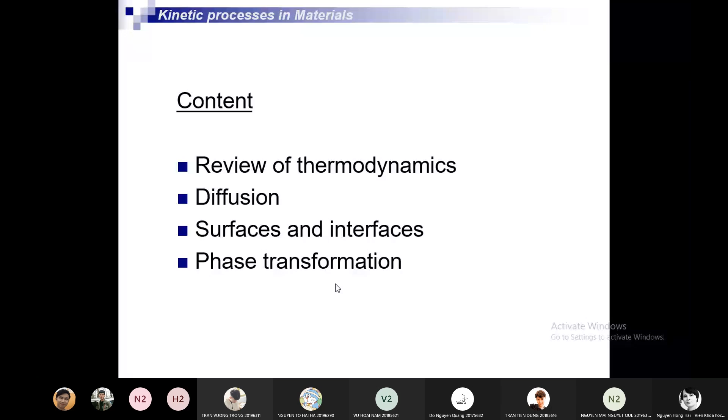So firstly, we classify matter by state. You know, matter can exist in 3 main states: liquid, solid, and gas.

And now there is another state: plasma, one more state. But the main states of matter are liquid, solid, gas.

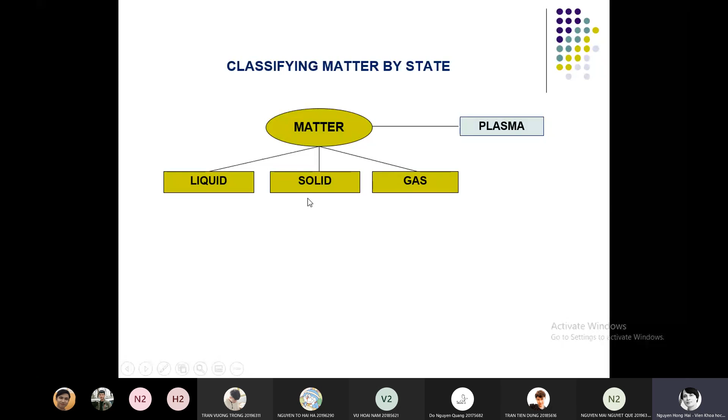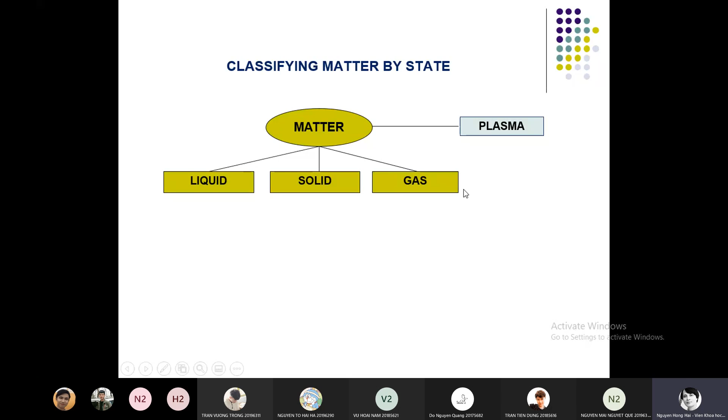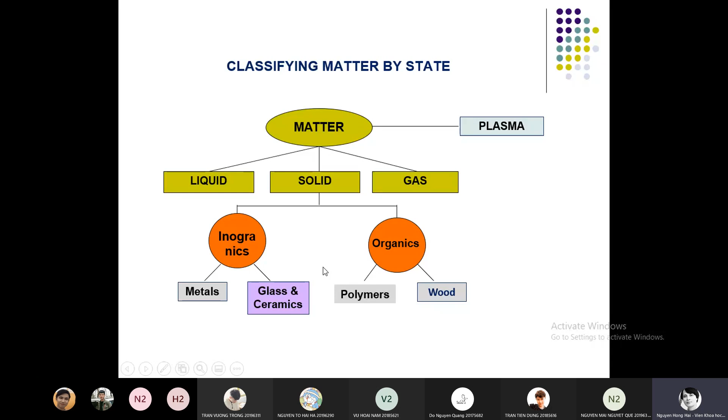Only solid can be considered as a material. Liquid and gas are not material. So for solid, we have inorganic and organic. For inorganic we have metal, glass, ceramic. And for organic, we have polymer, wood. So only this can be considered as material, only solid.

So to make a material, we have to transform liquid and gas into solid. This is the phase transformation.

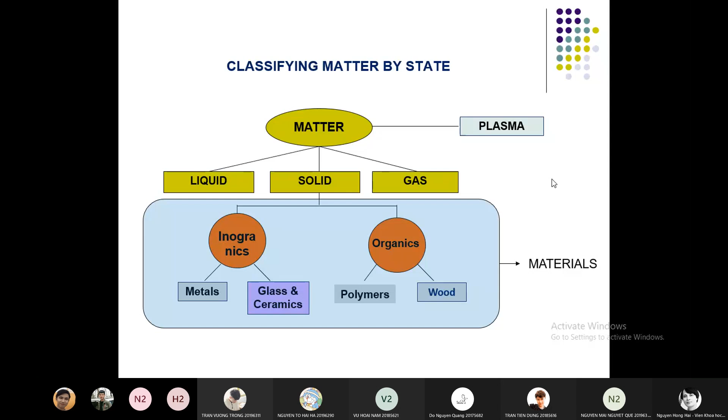And this is a material cycle. So from the raw material of the earth, we can obtain some raw material, and by synthesis and processing, we make material, engineered material. And from this material, we make the product, which we use in industry and in our conventional life.

And then we use this product. After this, maybe some waste, so it is returned by recycle to the synthesis and processing. So the cycle grows like this. Maybe some waste returns into the earth.

So your task here is processing to make the material, from raw material, to make the engineered material by synthesis and processing. So it is our field of study and activity.

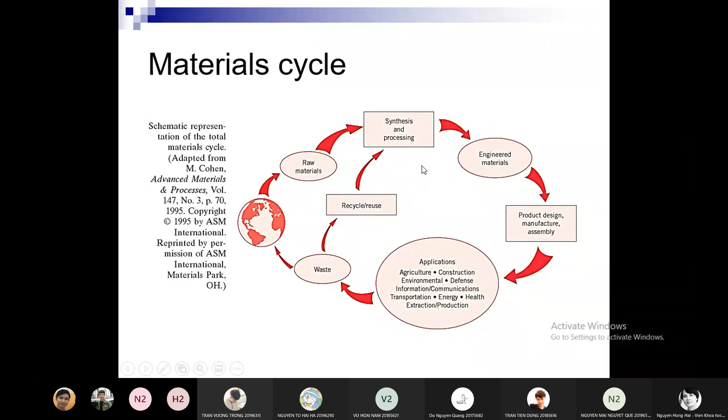By composition and synthesis processing, you can make the material with the desired structure and microstructure. And this structure and microstructure of material determines their properties and performances.

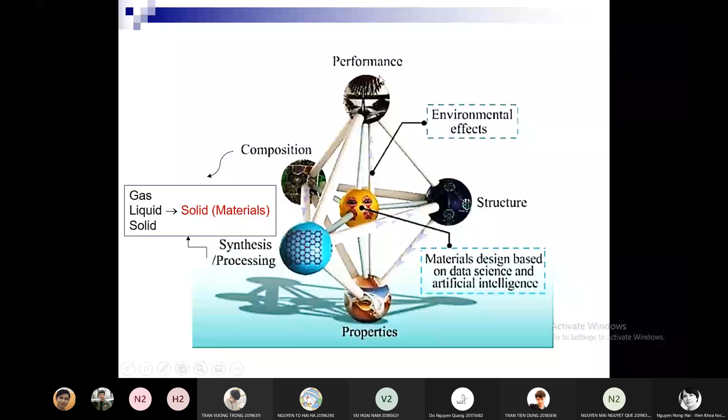So we have the main features: material composition, and synthesis and processing. This will determine the structure. Structure determines the properties and performances. And we can see in this picture the physical space of material.

So we begin from chemistry, from chemical composition. You can see here 5 circles. At the center, we have chemistry or chemical composition.

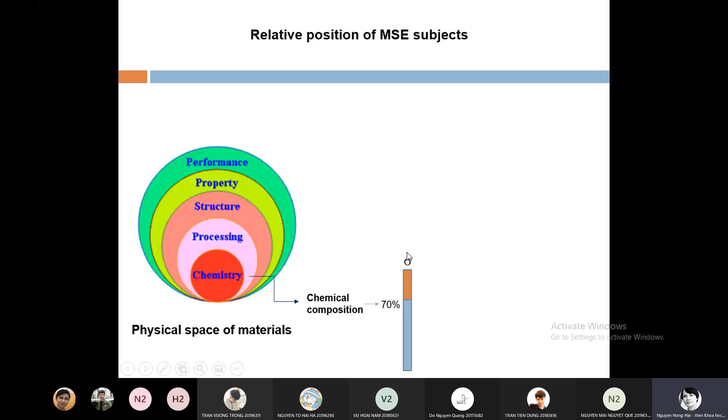From this chemical composition, we see that about 70% of the strength comes from chemical composition, of alloy, metal, and something like that. So the rest, 30%, comes from processing.

Processing includes something like crystallization, solidification, deformation, heat treatment, and so on. It is processing to make material, inert material, and this contributes 30% of strength. But we never reach 100% strength of the alloy.

Never, not yet. We tend to reach it, but at present nowadays we have not reached 100% of the strength of material. We will try to do this.

So beginning from chemical composition, via processing, we make the material with desired structure and microstructure. What is the microstructure of the alloy? It is the size and morphology of the grain, crystal grain, and lattice defects.

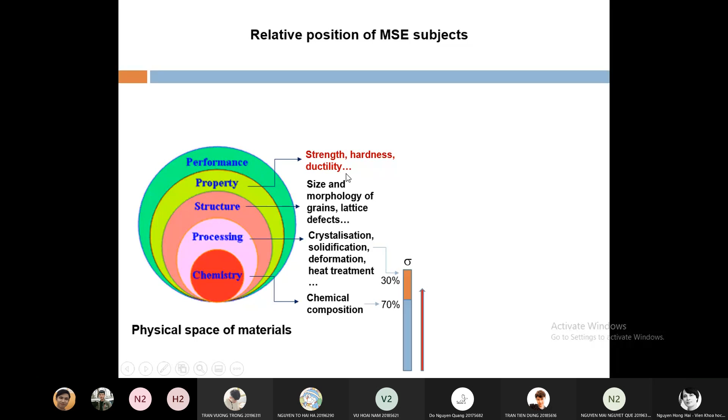strength, hardness, ductility, elongation, and so on — the trend — and finally performances, for example fatigue, creep, corrosion, and wear resistance, and so on. These performances are related with the environment.

So we have 5 cycles. The physical space of a material consists of 5 cycles like this: at the center we have chemistry, then processing, structure, properties, and performances.

So, corresponding to this physical space of material, we have this very strongly related environment, and the MSE subject, material science and engineering subject, like thermodynamic, kinetic, crystallography, property performances.

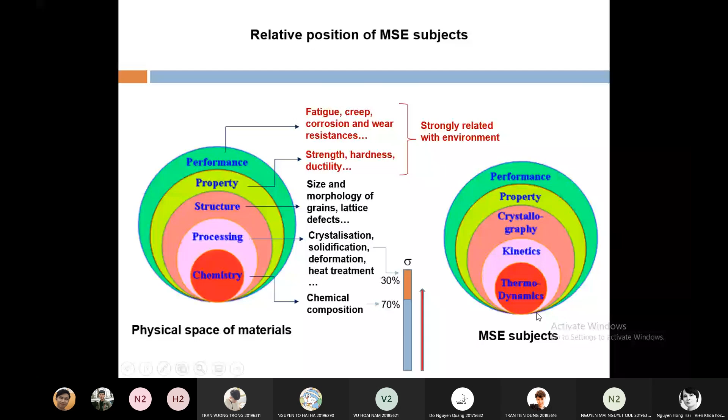So we have the 5-cycle corresponding to this physical space of material, and our subject, our course, kinetic process in material, belongs into this kinetic processing and kinetic. So we have kinetic process in material. This is the relative position of our course.

And you know that the difficulty increased towards the center. The thermodynamic is, our course is rather difficult, thermodynamic is the most difficult. Okay, so we have the physical space of material.

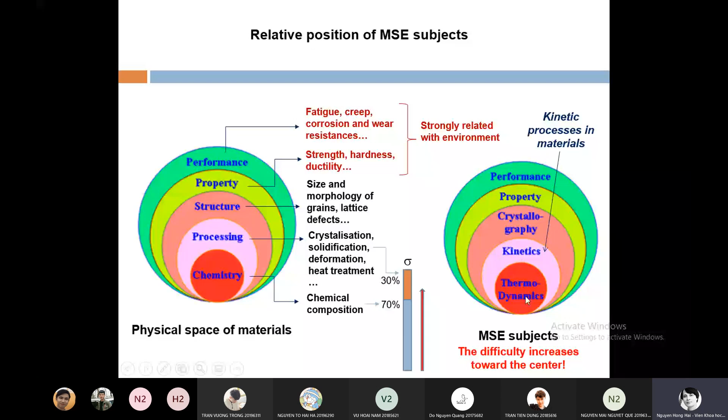Chemistry, processing, structure, property, performance. So the outermost cycle, the performance, characterizes how material behaves in the given environment, how the material behaves, and this is strongly related to the environment, the outermost cycle.

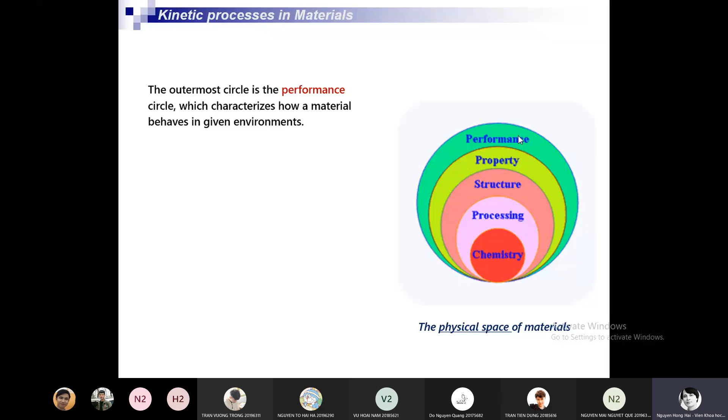And then the performances are realized by the set of the properties in the second cycle. So the properties are achieved by the agglomeration of the phases, its various structure.

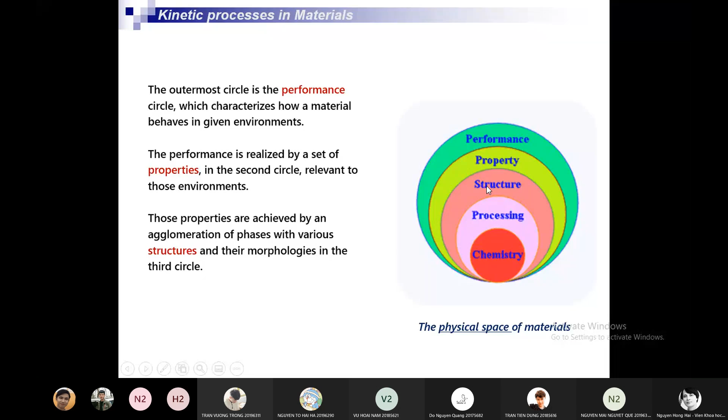So this property can be achieved by structure, and the morphology is the third cycle. And structure is obtained through the proper processing and the chemical composition, accurate chemical composition.

So the chemistry composition determines the structure. Structure determines the property and performances. So processing is a very important step in the making of material. It determines the structure of material, like metal or alloy.

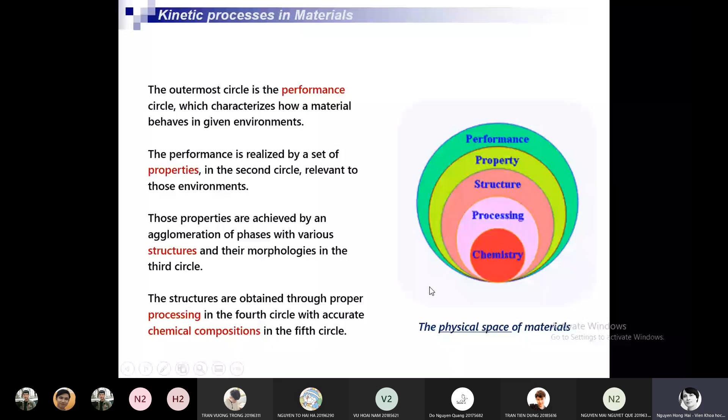So our course, kinetic processing, is the second cycle. And why the two outmost cycles, performances and properties, are very strongly related to environment - this one, chemistry, processing and structure, or thermodynamic, kinetic, crystallography - they are the key components of material science and engineering.

Three key components: crystallography, kinetic, and thermodynamic. And thermodynamic and kinetic are viewed as difficult subjects. So we have three key components of material science and engineering: thermodynamic, kinetic, and crystallography.

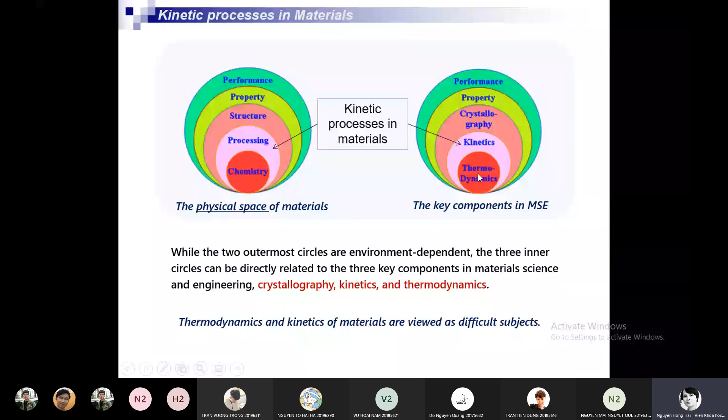So, different aspects of the material processing: structure, property, processing, and performances. Okay, so that's some introduction to the material.

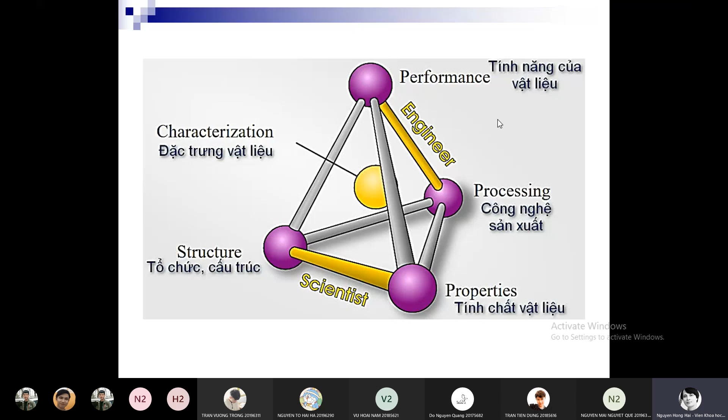So we now turn to thermodynamics. Chapter 1, thermodynamics. The main use of thermodynamics in physical metallurgy is to allow the prediction of whether an alloy is in equilibrium. Equilibrium is the most important concept in thermodynamics.

The alloy or the system is in equilibrium or not - we have to answer this question. And in considering the phase transformation, we are concerned with the change towards the equilibrium. If some system, some alloy, is not in equilibrium, it will change - it will change its structure, microstructure, and so on towards the equilibrium.

And for this, thermodynamics is a very powerful tool. But the rate at which equilibrium can be reached cannot be determined by thermodynamics alone. So we need kinetic processes. The kinetic process will allow us to know how quickly the equilibrium can be reached.

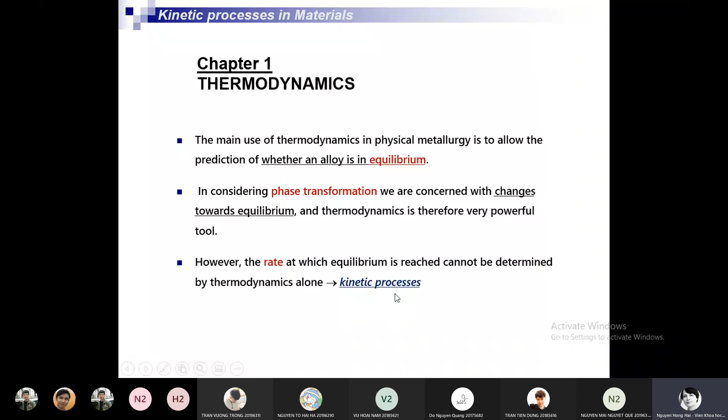It's a kinetic process. The thermodynamic allows us to know only whether the alloy is in equilibrium or not. But thermodynamics does not allow us to know how quickly the system can change towards, can reach, the equilibrium - that belongs to kinetic processes, not thermodynamics. So the main question of thermodynamics is whether the system is in equilibrium.

The main question of thermodynamics: if the system, the alloy, the phase, and so on, is in equilibrium. So what is the system? System is a mixture of one or more phases. Maybe one phase can constitute a system, but maybe more phases - so system is a mixture of one or more phases.

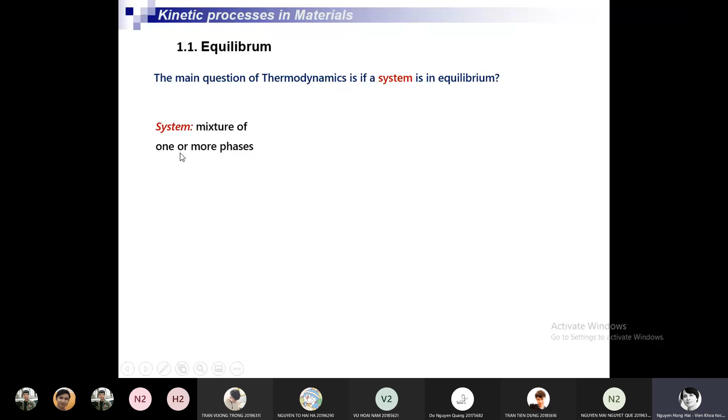For example, you have the aluminum-silicon alloy, aluminum-silicon system - it is a phase diagram, aluminum-silicon phase diagram. We have a eutectic here. So in this system, we have two phases, aluminum and silicon. So this system is a mixture of two phases, and we have a eutectic alloy, a eutectic composition.

It's about 12% of silicon. So before this composition, we have a hypoeutectic alloy. For example, alloy A356 with about 7% of silicon. So for this system, for this alloy, we have the microstructure like this. We have primary aluminum like this - it's a dendrite, in the form of a dendrite.

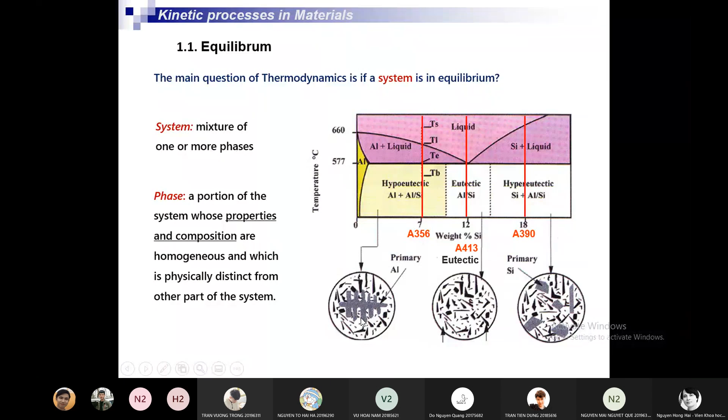For example, in this system, by grain boundary, by interface between the aluminum and eutectic - distinct from the other part of the system, mainly by surface, the grain boundary, and by interface between phases, is the phase. So you should remember what is the phase: two features. First is the properties and composition are the same everywhere, homogeneous, and physically distinct from the other part of the system by the boundary, by the interface. It's the phase.

So in this system, you have two phases, aluminum and silicon, and they are distinct. Okay, you can see silicon or aluminum absolutely distinct from eutectic structure. Okay, it is a phase.

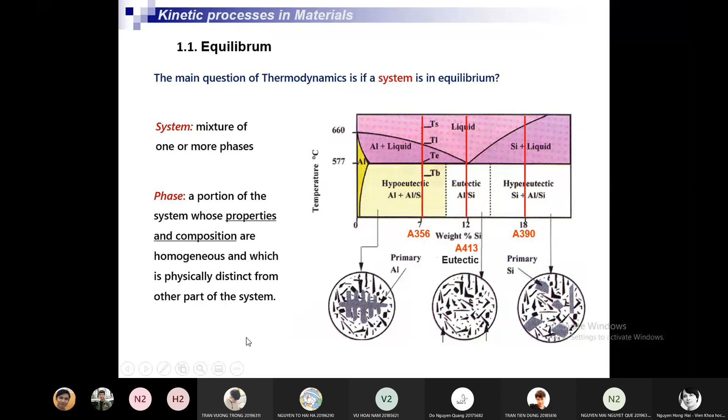So we have the example of this alloy A390. It's 18% of silicon. So we have this microstructure of the hypereutectic aluminum silicon alloy. This one. So we can see the primary silicon.

Platelet, gray, platelet like this. Very coarse, very harmful, it's very coarse. You see. And you have the eutectic - it is a fine silicon platelet embedded in the aluminum like this. It's eutectic.

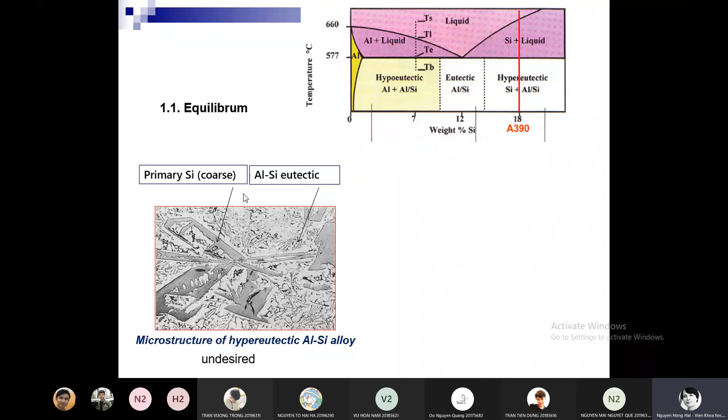So if the primary silicon is so coarse, very coarse, it is very harmful, and the mechanical properties of this alloy is not high, not high. We have to make this primary silicon finer. This is the undesired microstructure, because the primary silicon is very coarse, and so the mechanical properties are not high.

But what processing and how to do it is another question. To make the primary silicon finer, we have to apply some processing, some technology, some technique to achieve it. This is the role of processing. This processing allows us to have the desired microstructure to improve the properties of the alloy, of the material. That is why you need modern, recent processing processes, why you need to apply technology, high technology, and so on.

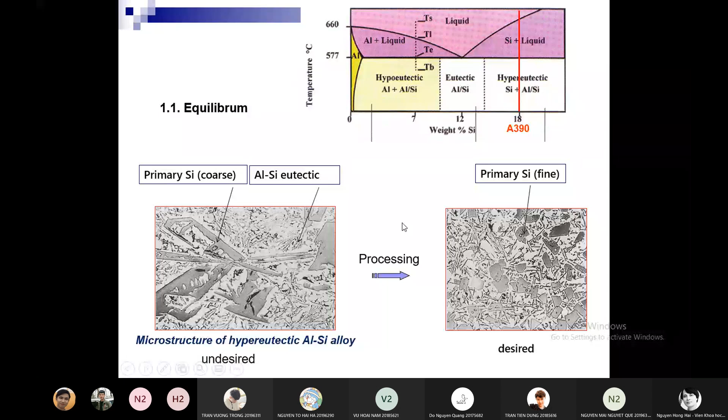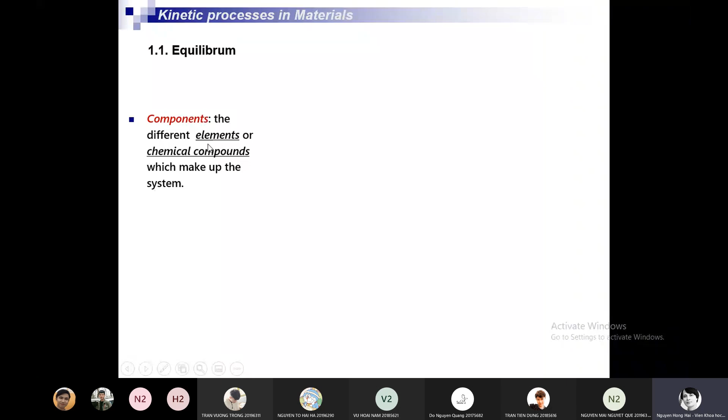So the next thermodynamic term is component. Component - it is the different element or chemical compound which make up the system. Maybe the element, maybe chemical compound - it's also component. So for example, we have the iron carbon system.

This component, and the composition of a phase of the system, can be described by giving the relative amount of each component.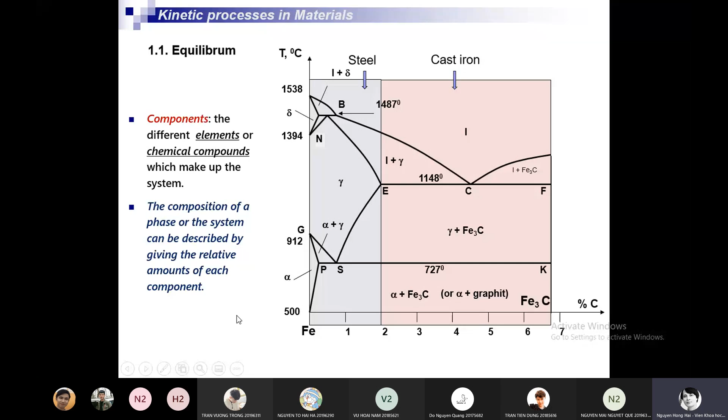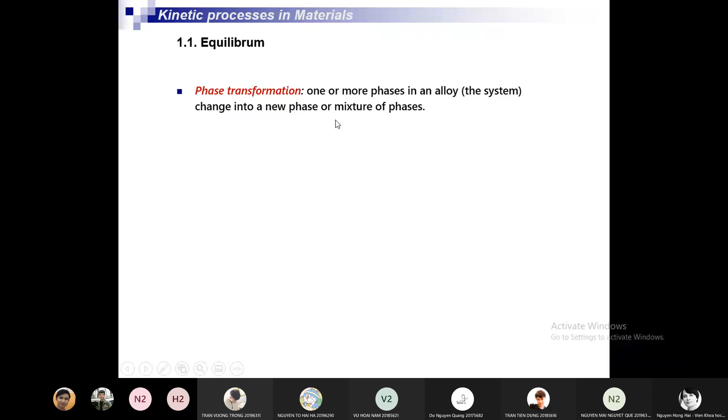So the phase transformation: one or more phases in an alloy or in a system - alloy is a system - change into a new phase or mixture of phases. One or more phases, maybe one, maybe more phases in an alloy, change into the new phase or mixture of phases. It's phase transformation.

For example, we have this aluminum silicon system, and there is some iron. So we have an intermetallic compound like this, and it is beta: aluminum 5, iron and silicon. They have a platelet form like this, and it is very harmful. It's an undesired microstructure. It's an intermetallic compound, beta, aluminum 5, iron and silicon. Very bad microstructure, undesired.

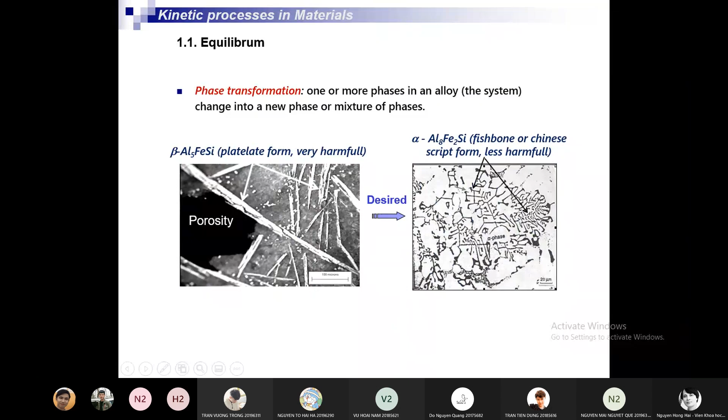This is more desired. You also have the intermetallic compound, but in the form of alpha, with the chemical formula aluminum 8, iron 2, and silicon. They have a fishbone, or Chinese script form, and are less harmful. It is desired, more desired than this one, for the aluminum, silicon, and iron system. In this system we have 3 components: aluminum, iron, and silicon.

You see, we have to make this microstructure instead of this one - it is very harmful. This one is much better because the intermetallic compound aluminum, iron, and silicon with the fishbone or Chinese script form is more compact than this one. But this is stable. This is stable, this is not stable - unstable. So because this is unstable, this microstructure will transform to this one, because this is stable. See, the desired transforms to undesired.

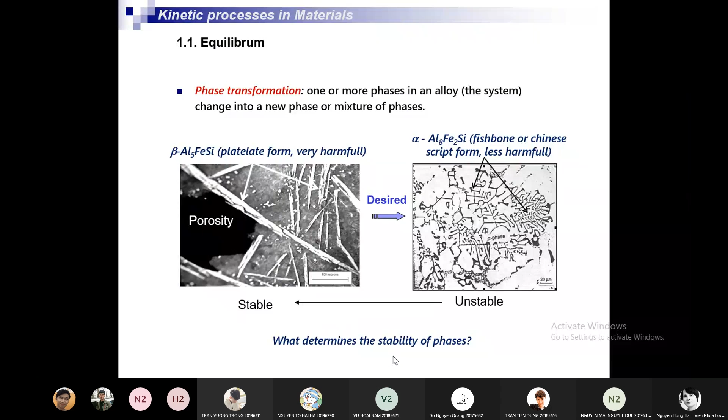So at constant temperature and pressure, the relative stability of a system is determined by the Gibbs free energy. And we have the formula to calculate the Gibbs free energy: G is the Gibbs free energy equal to H minus TS.

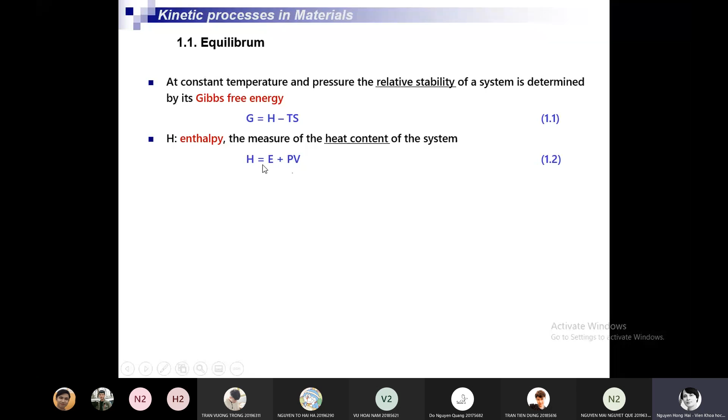H is the enthalpy. Enthalpy is the measure of the heat content of the system. Normally, enthalpy is equal to E plus PV, here E is the internal energy of the system, P is pressure, and V is the volume of the system. So enthalpy equals internal energy plus PV.

But in general, for condensed phases such as solid and liquid, the PV term is very small in comparison with the internal energy. So we can say that enthalpy is approximately equal to the internal energy, because this term PV is much smaller than the internal energy term.

It is H in the free energy equation, the enthalpy. T is absolute temperature, and its unit is the Kelvin degree. And S is the entropy of the system, the measure of the randomness of the system. So you see, enthalpy is a measure of the heat content, and entropy is the measure of the randomness of the system.

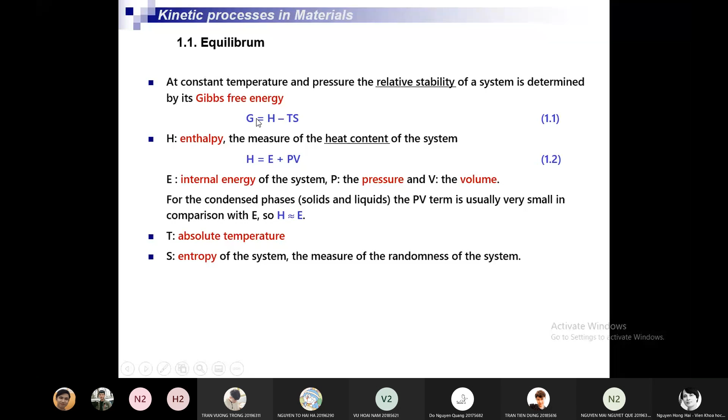So the stability of the system is determined by its Gibbs free energy, and the Gibbs free energy can be calculated by this equation, H minus TS. And from above you have the intensive properties. It means this property is independent of the size of the system - temperature and pressure are independent of the size of the system. It's an intensive property.

When they have extensive properties, they are directly proportional to the quantity of material in the system, and this includes volume, internal energy, enthalpy, entropy, and free energy. So we distinguish intensive properties, independent of the size of the system, like temperature and pressure, and extensive properties.

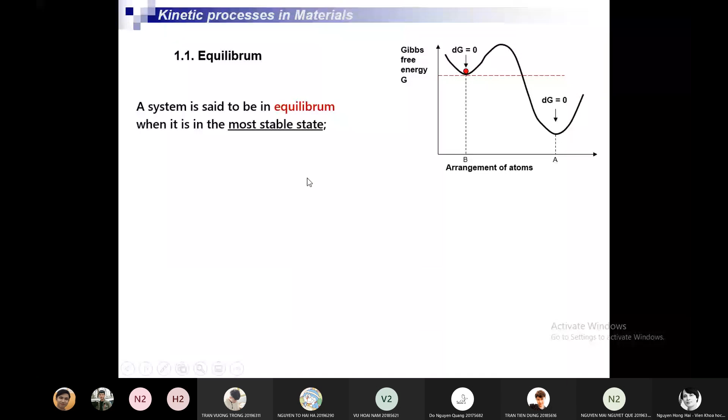So the system is said to be in equilibrium when it is in the most stable state. And stability is meant by this, by free energy. At constant temperature and pressure, a closed system - one system of fixed mass and composition is a closed system.

In the stable equilibrium, if it has the lowest value of the free energy, so we have the stable equilibrium, the phase, the system in the stable equilibrium. If it has the lowest value of the free energy, or in mathematical terms, you can write dG equal to 0, here or maybe here - it's minimum in the energy curve, free energy curve of the system.

Depending on the arrangement of the atoms, see, so here we have the minimum in free energy, here also. So in mathematical terms, you can write dG equal to 0 at minimum.

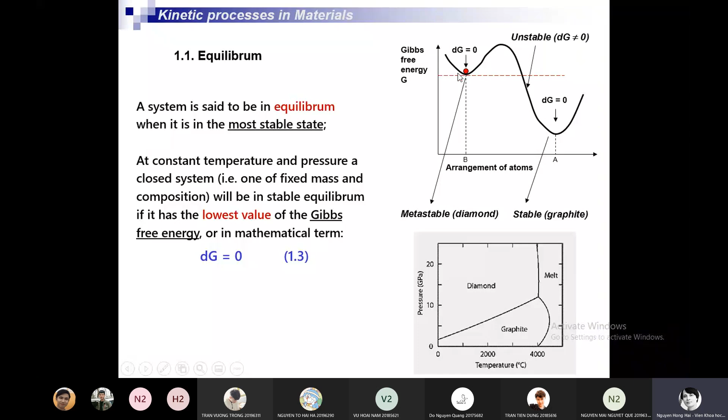So graphite is the stable form of carbon. Diamond is the metastable form because it has very high free energy, and with time...

From this equation we can conclude that the state with high stability will be that with low enthalpy and high entropy. Low enthalpy and high entropy, so free energy will be low. And if this free energy has the lowest value, so we have the stable system. Okay, so the state with higher stability is that with low enthalpy and high entropy, so they will be stable. If the state has high enthalpy and low entropy, we have an unstable state.

State is the arrangement of atoms. And from the unstable state, the system can transform to the stable state. But before this, the energy of the system must be increased a little bit. You see, before transforming from the metastable state to the stable state, the system has to increase its energy a little bit, this one.

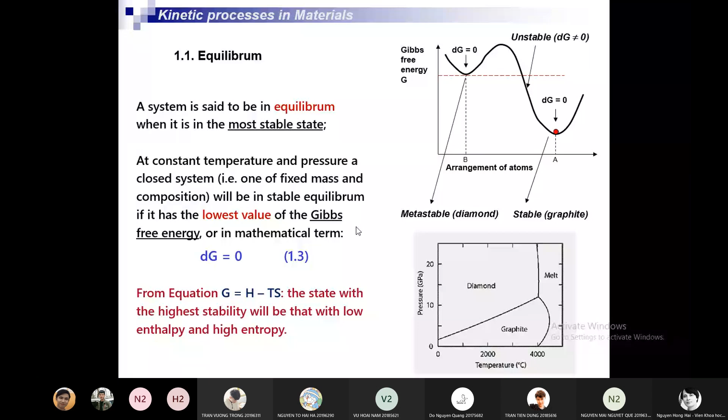So any transformation from the system with higher energy to the system with lower energy, from unstable or metastable state to the stable state, resulting from the decrease in the Gibbs energy. Any transformation that results in a decrease of Gibbs energy is possible.

In other words, any transformation is possible if the free energy will decrease after transformation. So the necessary criterion for any phase transformation is delta G, the change in free energy before and after transformation, must be less than 0. G2 is less than G1, so G2 minus G1 is less than 0, the decrease in free energy. So the transformation is only possible if the free energy decreases after transformation.

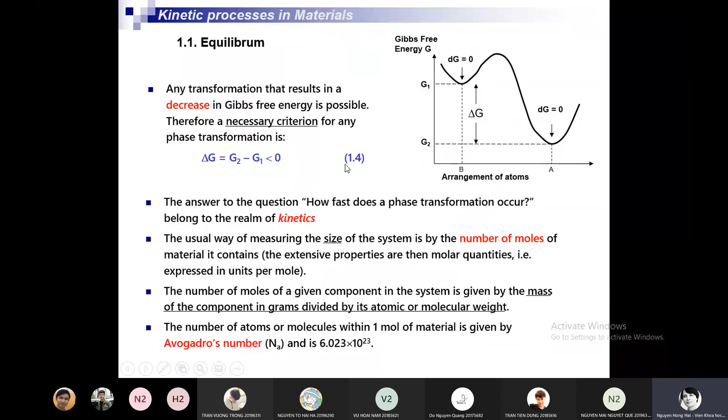Some feature of thermodynamics. And we turn now to the single component system. Only one component in the system. It is single component. So the single component system is a system which contains the pure element or one type of the molecule.

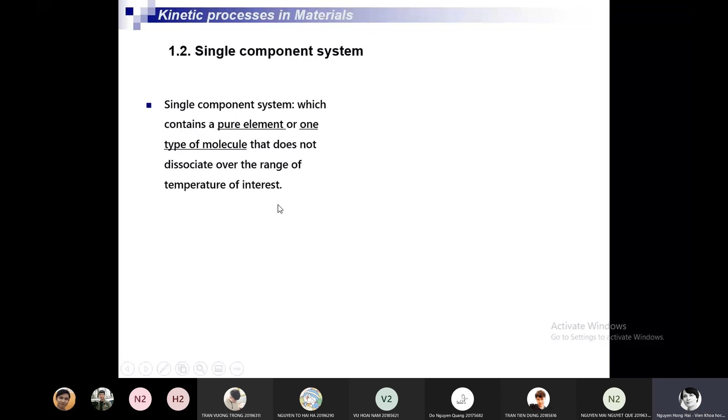This contains only pure element or one type of molecule, and this does not dissociate over the range of temperature of interest. For example, we have this example of carbon dioxide, the carbon dioxide pressure-temperature phase diagram. See, showing some triple point and critical point of carbon dioxide, and we have in this range of temperature and pressure only gas.

Here we have solid in red, and we have liquid and supercritical fluid here. So it is a single, only one molecule, carbon dioxide.

So in order to predict the phases that are stable or the mixture that are in equilibrium, we say the phase is stable or the mixture of phase, the system, are in equilibrium. At different temperatures, it is necessary to calculate the variation of free energy with temperature.

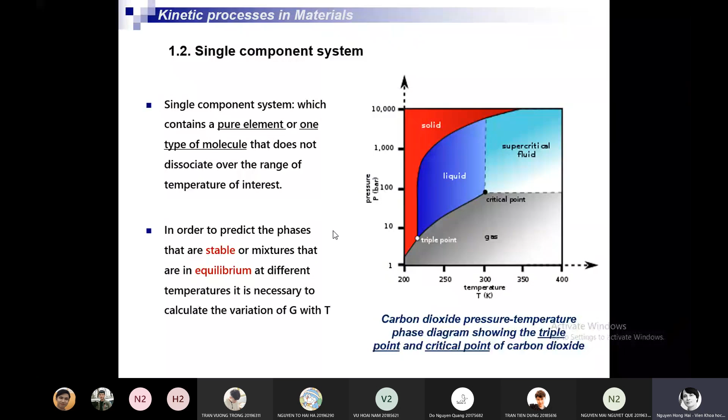So now we introduce some other thermodynamic term, the specific heat. Firstly, it is the quantity of heat in joules required to raise the temperature of the substance by 1 degree Kelvin. The heat we have to supply to the substance to increase its temperature by 1 degree Kelvin, it's the specific heat. We have the specific heat by definition, and we can write it in mathematical terms, we can write C.

Specific heat is equal to the derivative of enthalpy, because enthalpy is a measure of the heat of the system. So it is the first derivative of enthalpy with respect to temperature at constant pressure. This is specific heat: the quantity of heat, expressed by enthalpy, that we have to supply to the substance to increase its temperature by 1 degree Kelvin.

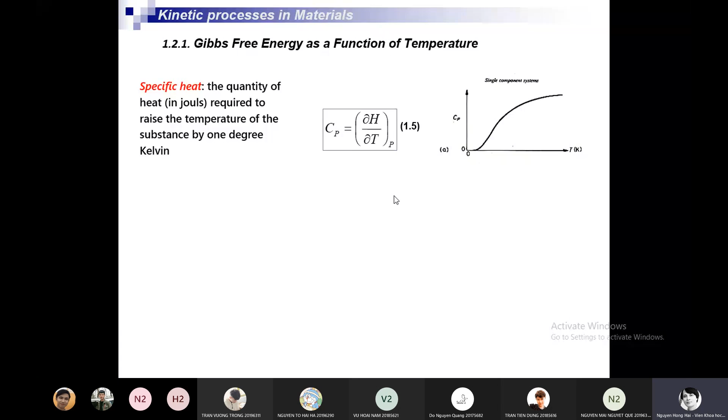Then we have the variation of enthalpy with temperature, which can be calculated by integrating this equation. If we integrate this equation, we can find the variation of the enthalpy. In mathematical terms, we take the integral from the reference temperature to the temperature of interest of Cp dt. So here is the graphic: the enthalpy curve versus the temperature.

The slope of this curve is the specific heat slope. And at this temperature, 298 degrees Kelvin, the enthalpy is zero. So we have the enthalpy curve.

The variation of entropy with temperature can also be derived from the specific heat, taking the entropy at 0 degree Kelvin as 0. So the entropy of any system at 0 degree Kelvin is equal to 0. From 0 Kelvin to the temperature of interest, we take the integral of the ratio Cp over T, dt. And we have this entropy curve versus temperature.

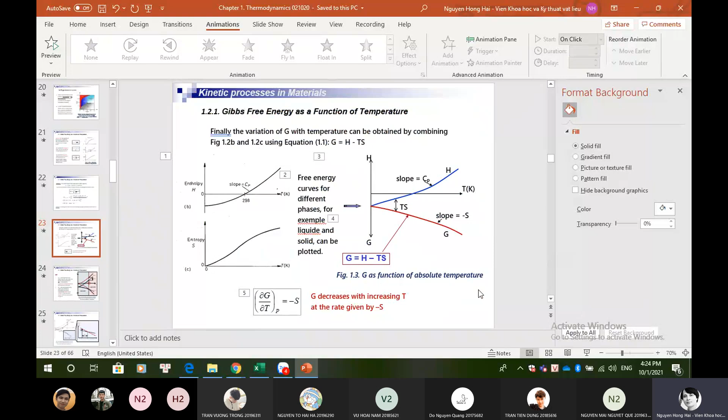So, okay, do you need some rest? Yes. You will have a small break? Yes, okay, 10 minutes? Okay, 10 minutes, yes. So we have a small break, some rest before we continue.

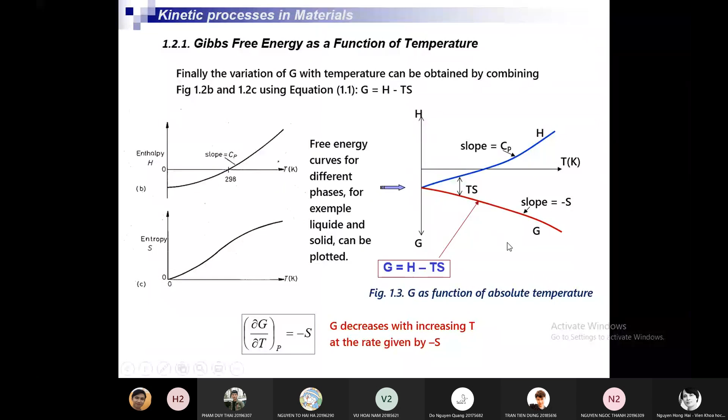So we have the free energy, and we have it like this. You can compute the free energy curve like this, the free energy curve of liquid, the enthalpy curve of liquid, and the free energy curve of liquid and that of solid, and the enthalpy curve and free energy curve of solid.

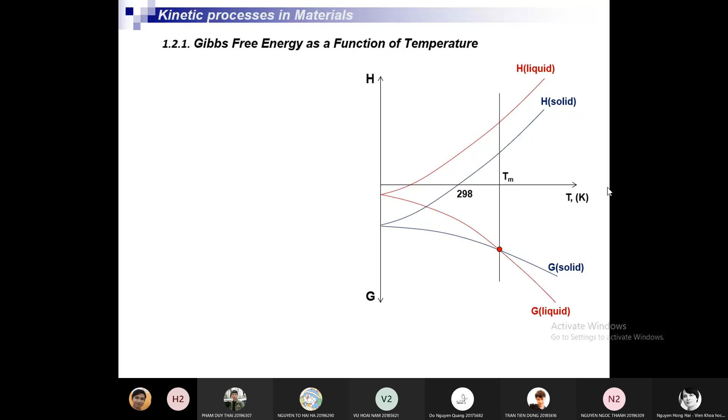And at the melting temperature, Tm, the free energy curves of the solid and liquid are equal to each other. So we can say this is the equilibrium temperature. At Tm, the melting temperature of the alloy, both liquid and solid phases have the same value of G. These curves intersect, and at the intersection they have the same free energy value, so you can say the solid and liquid are in equilibrium, because their free energies are equal. So Tm is the equilibrium melting temperature, as far as pressure is concerned.

So this is the melting equilibrium temperature. At this temperature, the heat supplied to the solid, to the system, will not raise the temperature, but will supply the latent heat required to convert solid to liquid.

This is the interval BC. So at this temperature, if you supply heat energy to the solid, the temperature does not increase, it remains at Tm, but it converts from the solid state to the liquid state, and this is the latent heat of melting, this interval BC.

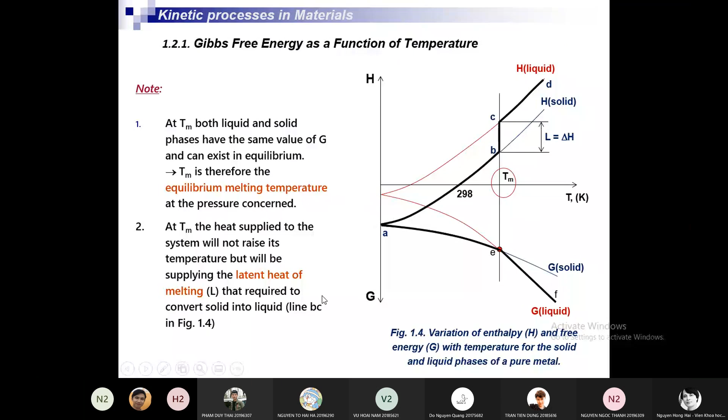With transformation, see the two energy curves, the free energy curve and enthalpy curve. Enthalpy is also an energy. And here we have the solid, and higher than this temperature we have the liquid state, solid and liquid state.

And we should pay attention to this equilibrium melting temperature, a very important feature of the system. So you can see the free energy is a function of temperature, and it decreases with temperature. The higher the temperature, the lower the free energy.

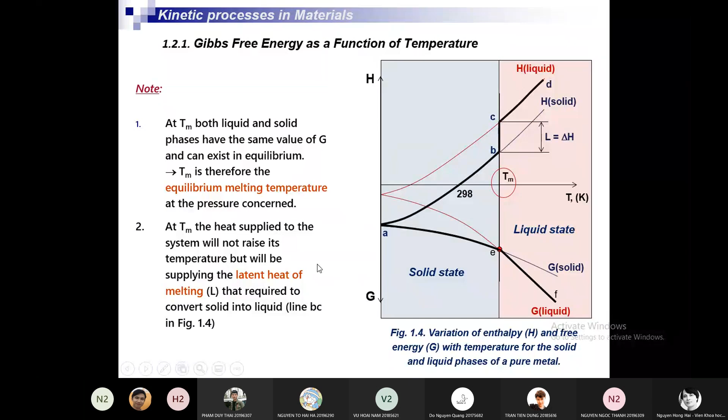So we have this: the enthalpy curve of the system A, B, C, D, and the free energy curve of system A, E, F. If you magnify this, for simplicity we substitute the curve by a line.

So we have the free energy curve of the solid and the free energy curve of liquid, in red and black. At the melting temperature, they are in equilibrium. It means their free energies are the same, are equal.

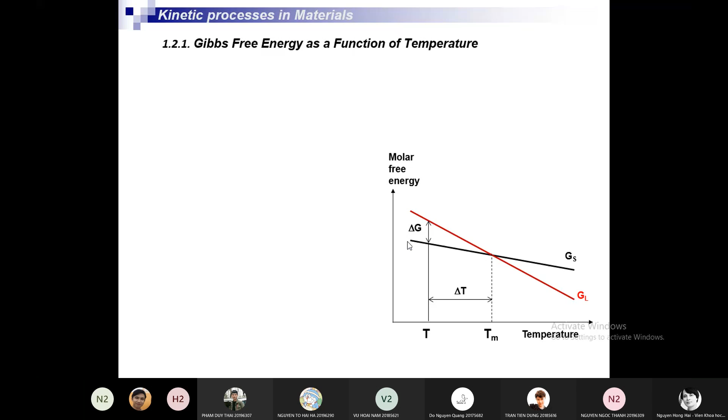Let's analyze this graphic: molar free energy versus temperature. We have the free energy curve of liquid in red, and the free energy curve of solid in black. At this temperature, you have the reversible transformation, liquid to solid and solid to liquid, because they are in equilibrium. So if some amount of solid transforms to liquid, the same amount of liquid will transform into solid. So we have the reversible transformation.

Reversible. Or we can say there is no transformation here, because the solid and liquid are in equilibrium. So they can exist together at this temperature.

Hello. Chào thầy đi nhé.

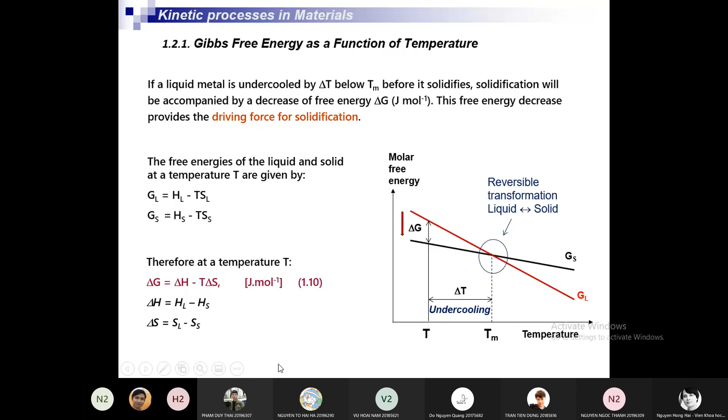Okay, so at equilibrium, the free energy curve, the free energy of solid and liquid are equal, so we have delta G is 0. At this equilibrium temperature, the free energies are the same, so the difference is 0. So we have delta H minus Tm multiplied by delta S is 0.

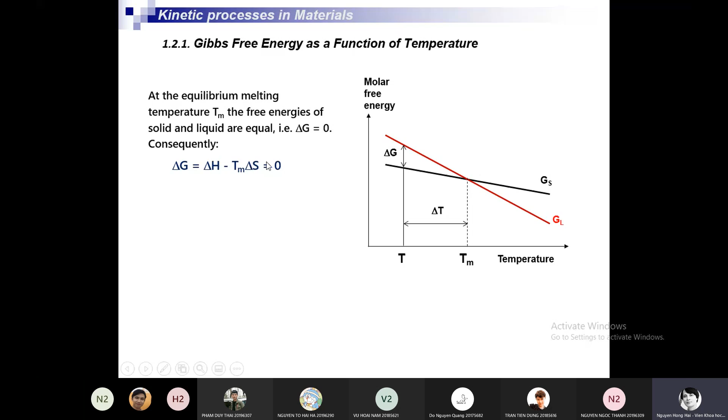So from this you can find that delta S, the entropy of fusion at this temperature, is equal to delta H over Tm. So delta H is the latent heat, so the delta SF is equal to delta H over Tm.

We introduce one more thermodynamic term, the entropy of fusion, entropy at temperature Tm. This is known as the entropy of fusion, and for most metals this entropy of fusion is equal to about the gas constant, about 8.3 joules per mole per degree. So now we know the entropy of fusion.

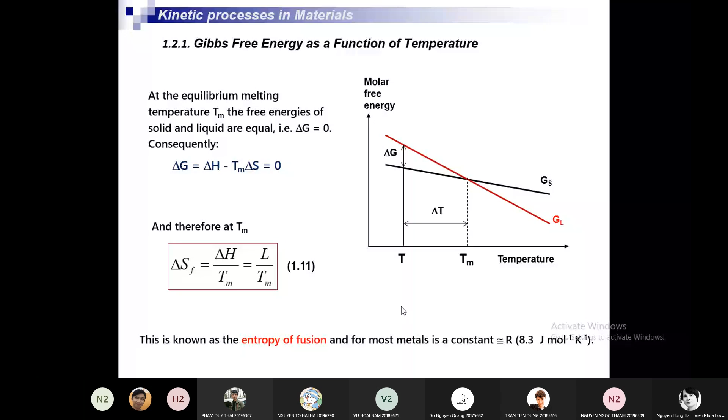For small undercooling, if delta T is small, the difference in specific heat can be ignored, so we can say the specific heat of the liquid and solid are equal if the undercooling is small. In this case, delta S is approximately independent of temperature.

So you can combine these three equations: delta G equals delta H minus T delta S, and delta S equals delta H over Tm. We combine them and substitute delta H by the latent heat of melting, and delta S by delta H over Tm in this equation. We rewrite it, and finally we have delta G equal to delta S multiplied by delta T.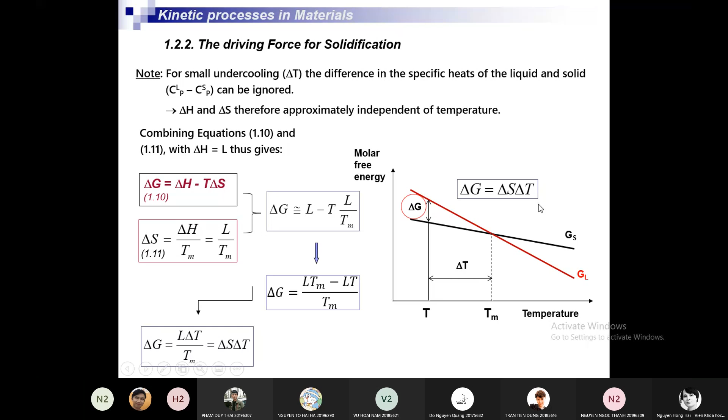You should remember this conclusion: delta G, the driving force for transformation, is proportional to delta T, the undercooling. So our task is to develop as large as possible the undercooling, so the crystallization process can occur faster, more nuclei can form, and we have the final microstructure. That's the role, the sense of undercooling.

So the question: how much is the maximum undercooling, this delta T? It's the temperature range below the equilibrium melting temperature where the alloy is still in the liquid state. In this temperature interval the alloy is still liquid, not solid, and only at T does the liquid transform to solid. That's the physical meaning of undercooling: a temperature interval in which the liquid alloy is still in the liquid state, below the equilibrium melting temperature.

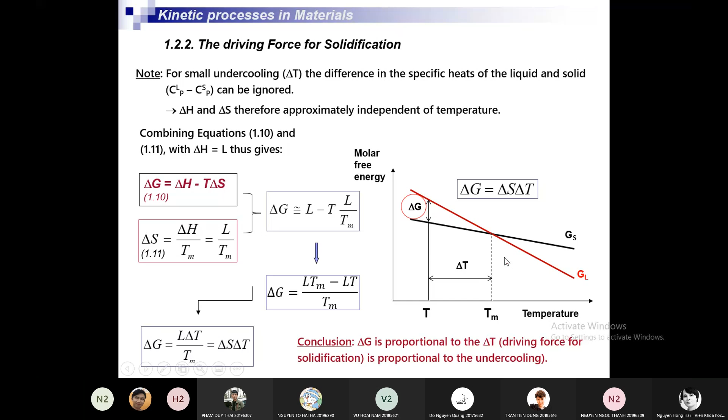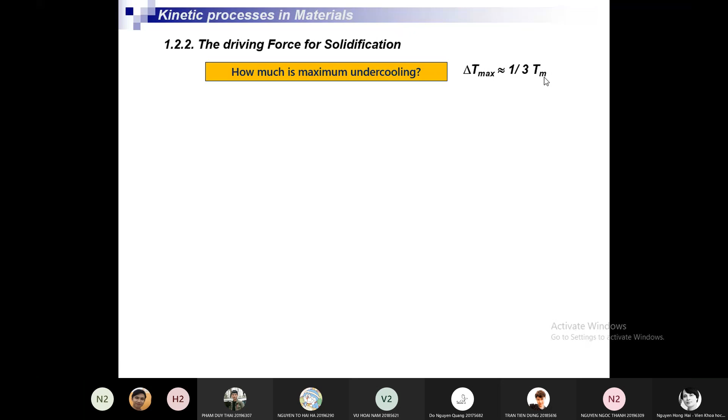So the question: how much is the maximum undercooling? In general, the maximum undercooling is about 1/3 of the melting temperature. For different metals there are different values of undercooling. For example, for aluminum the maximum undercooling is about 195, for iron about 295, and for copper about 236.

For example, for aluminum, the equilibrium melting temperature is 660 degrees. If you can reach this undercooling, it means at a very low temperature, about 465 degrees, aluminum is still in the liquid state, not solid, if you can obtain this undercooling.

This maximum undercooling is obtained by metal atomization, this process of atomization, which is needed for homogeneous nucleation. The maximum undercooling, very large undercooling, can be obtained only by this atomization process. This shows the maximum undercooling for some metals.

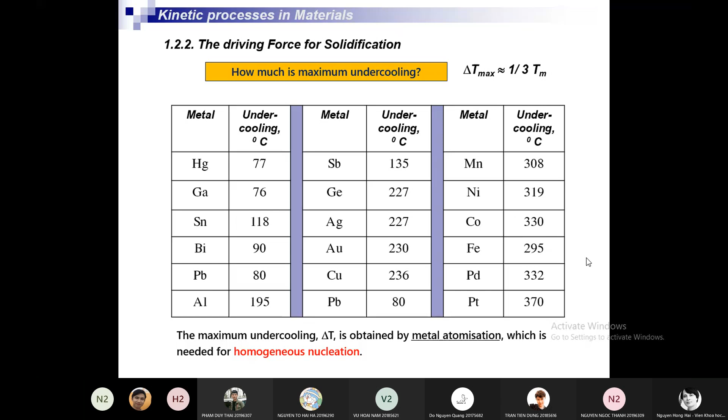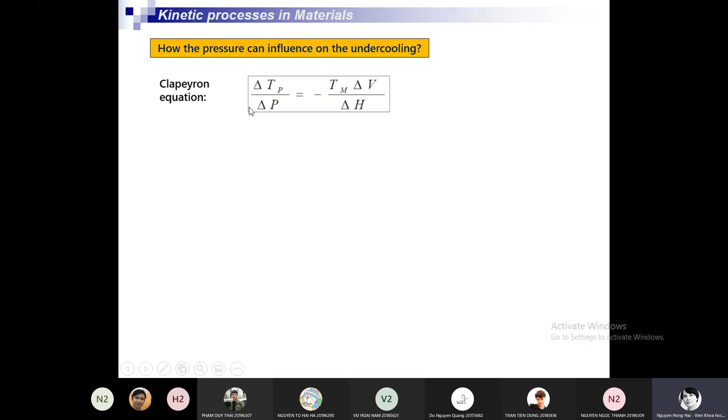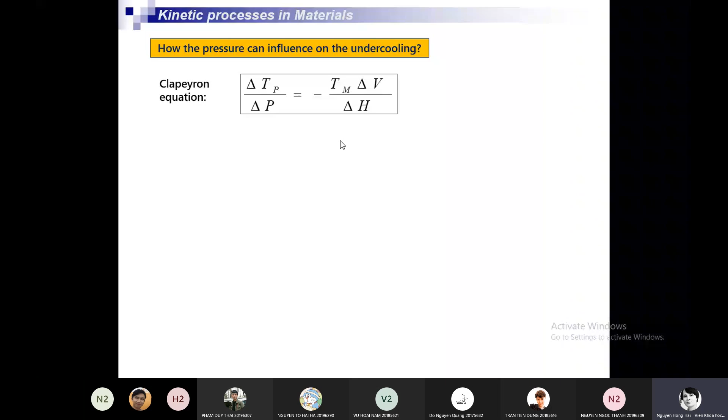The next question: how does pressure influence the undercooling? We have the Clausius-Clapeyron equation like this: delta T, the increase in undercooling because of pressure, over delta P, is equal to minus Tm times delta V over delta H, where Tm is the equilibrium temperature, delta V is the change in volume, and delta H is the change in enthalpy. This effect is very small.

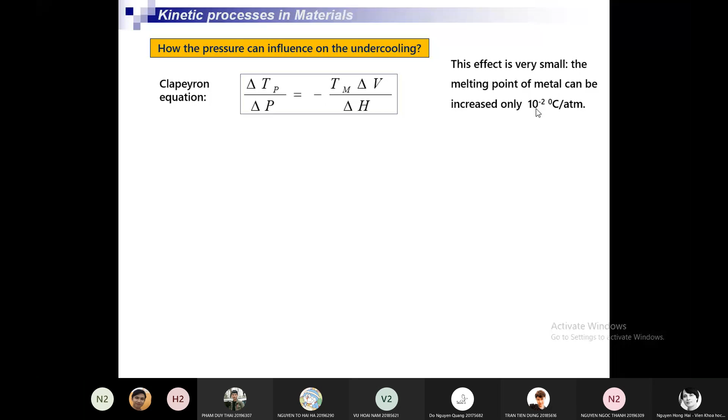The melting point of a metal can be increased only by 10 power minus 2 degree per atmosphere. So if you add 1 atmosphere to the liquid, the melting temperature increases only by 0.01 degree. Very small effect.

So, for example, we have an example to estimate the change in equilibrium melting point of copper. Estimate this delta Tp caused by the change of pressure delta P of 10 kilobar. 1 bar is approximately equal to 1 atmosphere. If the pressure changes by 10 kilobar, how much do we change the melting point?

We have to find the undercooling caused by pressure. The molar volume of copper is 8 multiplied by 10 power minus 6 cubic meter for liquid and 7.6 for solid phase. The latent heat of fusion of copper is 13.05 kilojoule per mole. The equilibrium melting point of copper is 1085 degrees Celsius at normal condition, room pressure and temperature.

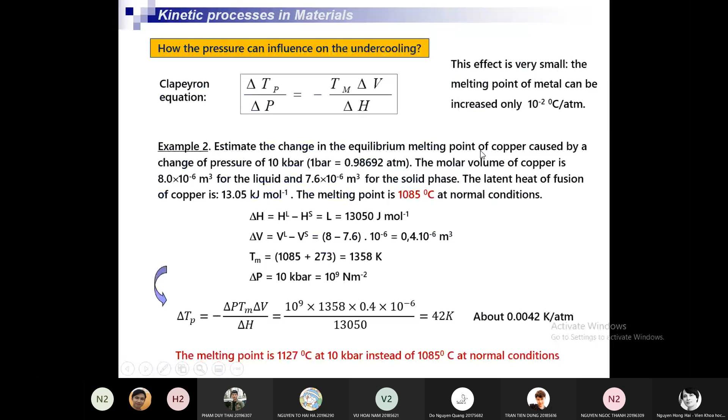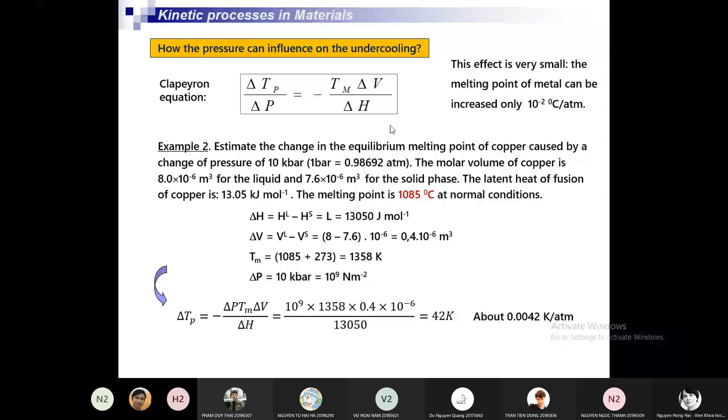This is the example of the effect of pressure on the melting temperature of the metal. It's very easy to solve. So this is something on the single component system. But in practice, we rarely apply the single component system.

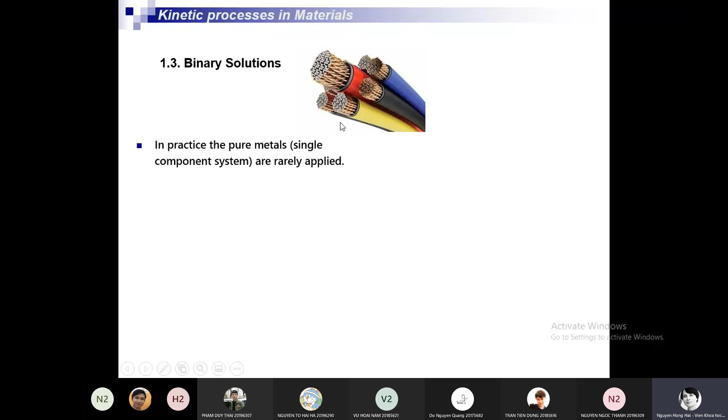For example, we can use pure copper to make electrical wire like this, maybe pure copper or pure aluminum. In this case, we apply the single component system, or maybe pure iron to make the core of the transformer. So you can see it is very rare cases - for electrical wire or core of the transformer, it is pure iron, pure copper, or pure aluminum.

In practice, we apply a system that is not single component, at least two components. This is the binary solution - it means there are two components in this system, in this solution, not single. But we will postpone this binary solution to the next lesson.